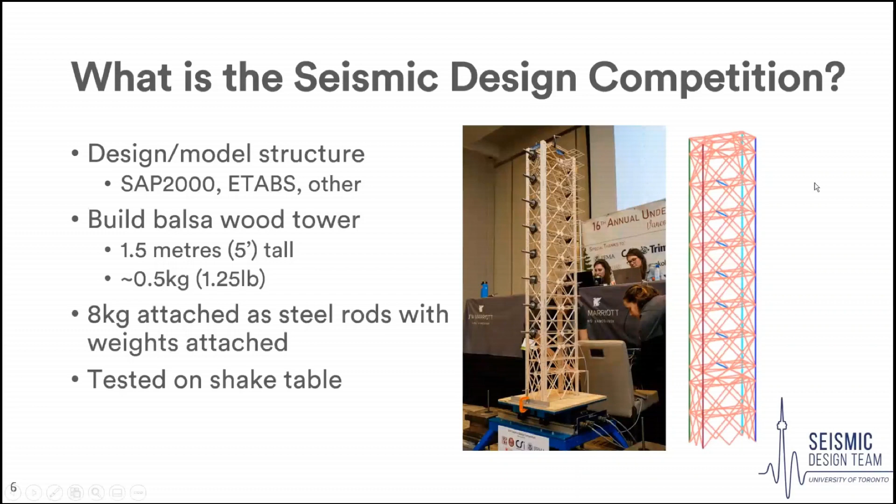So also, what is an earthquake? This is kind of really complicated, deals with plate tectonics and the earth moving around. But for us, what we need to know is it's a base excitation. So it's going to move the building, and it's going to be based on displacement. The earth is going to move 1 meter, and the building has to move 1 meter with it, because that's what it's being supported on.

It has some intrinsic properties, most notably the frequency content, which I'll get into later, but it's basically just what frequencies of building this earthquake is going to really impact. So just remember that earthquakes have something called the frequency content, and we'll explain that more later.

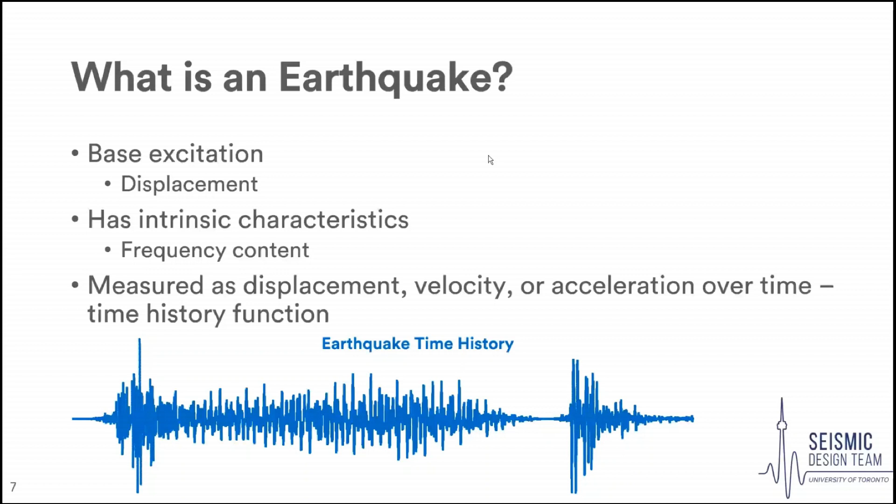So where are forces coming from in an earthquake? In normal loads, they're static, which means they don't change over time, and they're usually a result of applied pressures, like a desk pushing down on a floor. They're applied only in one direction, so usually you only have to worry about your maximum forces in one direction. A member is usually only in compression or only in tension. And it's applied at the point of contact, so where that desk touches the floor or where the wind is pushing on the building.

Earthquake loads are quite different. They're dynamic, so they're changing over time. You might have a different acceleration at one time than another. And they're also inertial, so they're not as a result of something pushing on something. They're a result of mass being accelerated and resisting that acceleration. This is, as I said before, generated due to the displacement at the base.

These loads are multi-directional, so an earthquake is shaking back and forth. You can have maximum displacement in one direction, then it'll come back around to the other direction. And so usually members that you might only have to worry about for compression, you might now have to think about compression and tension, have to think about both ways. You can't just design it to only be stiff in one way.

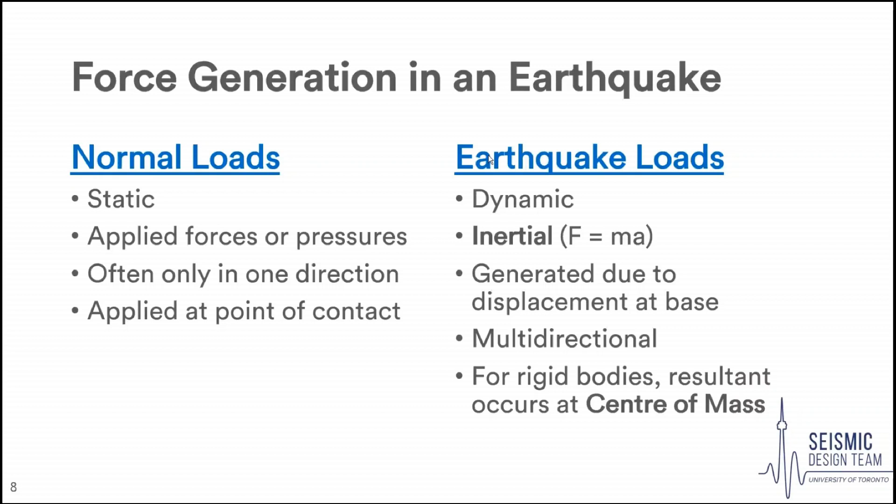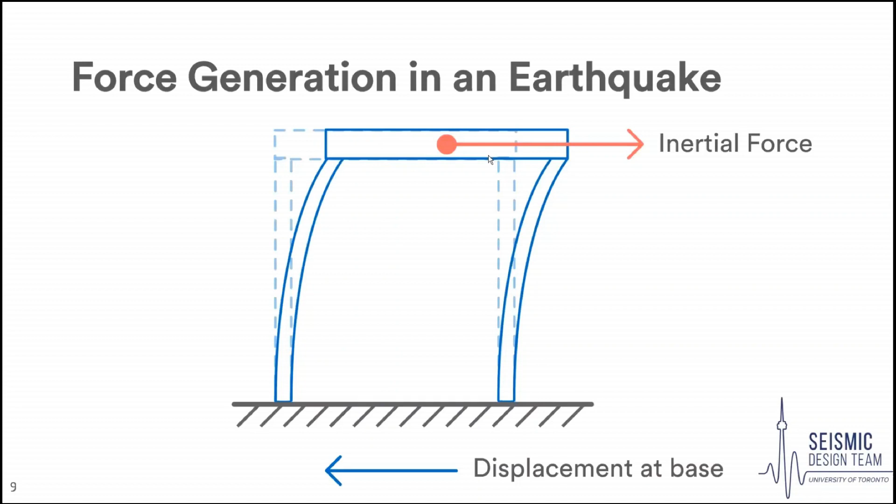So as the Earth is moving to the left, the mass is resisting it, and there's inertial force to the right. And you could think of this kind of like when you're on a subway or on a bus. As a subway or bus accelerates forward, you feel as though you're pushed back. And then when it comes to a stop, you feel like you're being pushed forward. And that's kind of that inertial force.

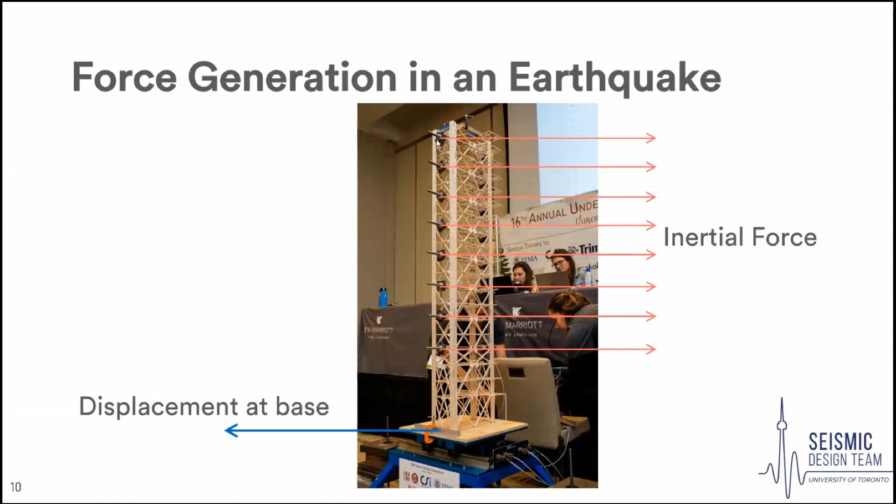So in the context of the competition, I know the angle isn't perfectly right, but if you imagine there's the displacement at the bottom, and then at each one of those masses, we have that inertial force going the other way. The reason we can just simplify it to the masses is that those masses weigh 16 times the weight of the building, so they're generating most of that force.

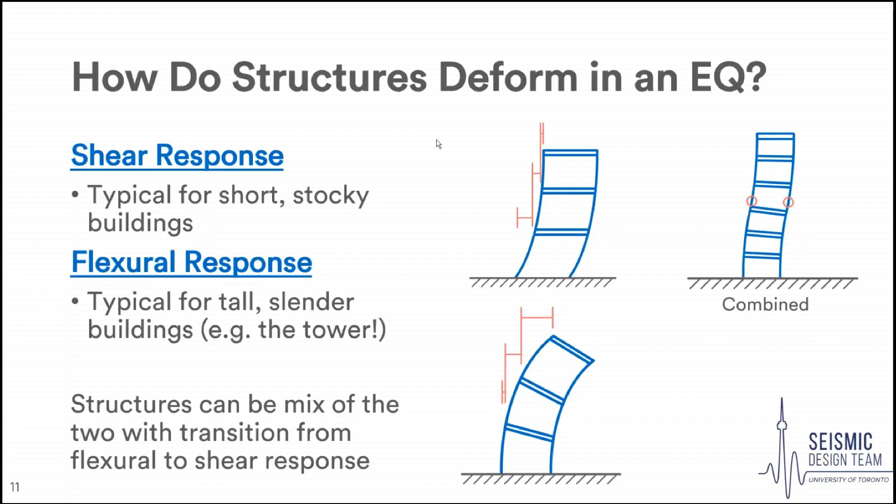A flexural response, which is on the bottom left, is the opposite. This is what happens in taller slender buildings, such as the tower. And as you go up and up, you'll have more and more relative displacement between the floors. You can also have structures that are a mix of the two with a transition from a flexural to a shear response, which you can see on the top right. And you can also see where I put the red circles, that's where it's transitioning from a flexural response to a shear response.

If you imagine a building with a flexural response and you kind of turn it on its side, you can pretend it's kind of like a cantilever, just pushing down. And just same as a cantilevered beam, you're going to have compression on the bottom and tension on the top. So if this is your tower, and you have a column in the middle and on the outer edges, you're going to have the most amount of compression on the bottom. In the middle, there's going to be much less force, and on the top, you're going to have the most amount of tension. And it's going to come in useful later when we're thinking about our tower as just a little bit of a cantilever.

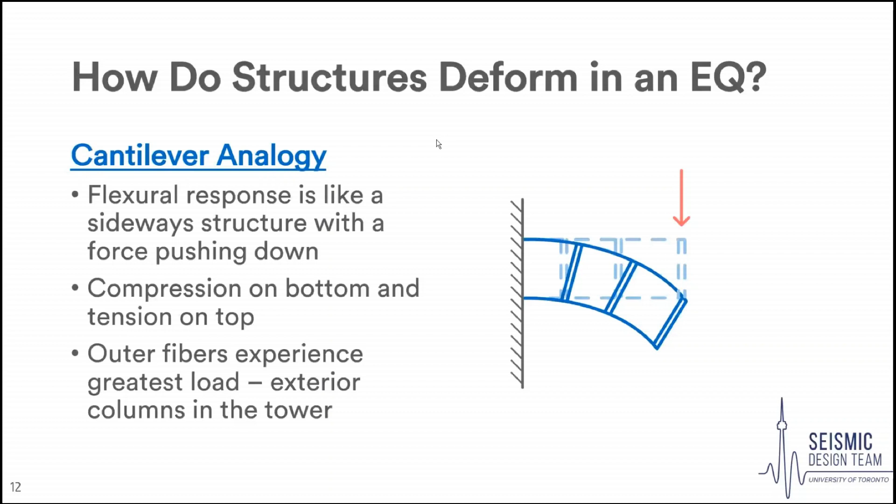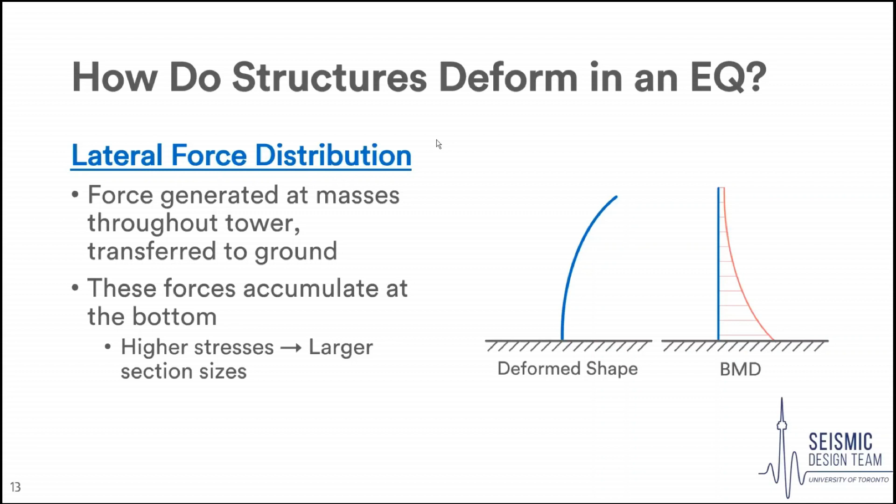What's also important is what's called the lateral force distribution. So this force is being generated throughout the tower, but eventually it has to all come back down to the base and get dissipated down to the ground, which means that these forces accumulate at the bottom. So you're going to have the higher stresses there and larger section sizes. So on the right, if we pretend that our building is still a bit like a cantilever, that's going to be this deformed shape, and that's going to be the associated bending moment diagram, close to zero at the top and then getting larger and larger as we go down.

So what is a free vibration? A free vibration is what happens when we fix the base of the tower. We'll put in all the weights, and we're going to excite the tower. So this means we can push it or pull it and just let go. And that's how we get those free vibrations. You can imagine those door stops where you accidentally hit it and it's just going to go boing, back and forth, and eventually come back to rest.

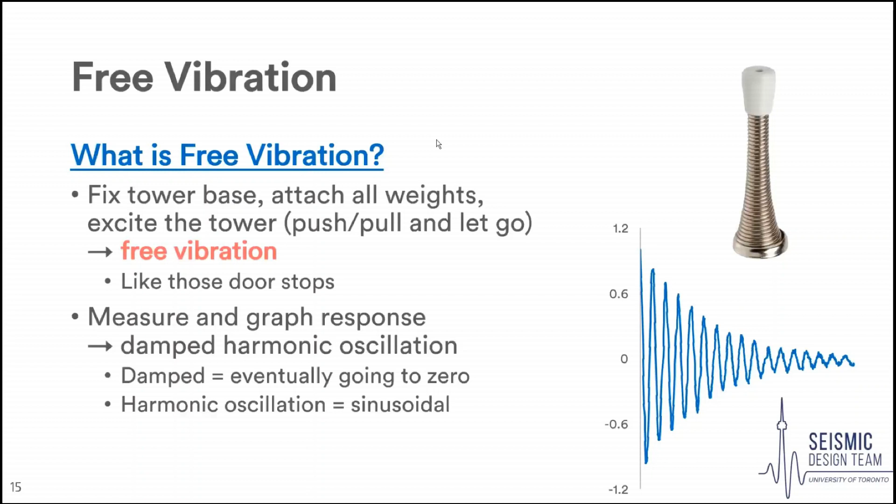And what we can do is measure and graph that response. So if we put, for example, a phone on the top of the tower, tape it down really well and use the accelerometer app, you'll get what's called a damped harmonic oscillation. Big word, but damped just means it eventually goes to zero, which you can see, and harmonic oscillation is just a fancy word in that it's sinusoidal. You can see those waves going back and forth.

Something that's really interesting that we can do is our towers are really complicated, but we can simplify them in the most basic way into what's called the single degree of freedom model. It's called the single degree of freedom model because a degree of freedom is how something can move, and this can only move in one way, back and forth, as you can see in the image.

And all this has is a certain mass at the top, M, and then a member supporting it with a certain stiffness, K, and this stiffness can depend on how strong the balsa wood you're using is, how tall your tower is, what size the sections you're using are. Bigger columns are going to be stiffer than skinnier columns. And also what's called damping, C, which I'll get into a little bit later, which refers to how fast your tower dissipates that energy and comes back to rest.

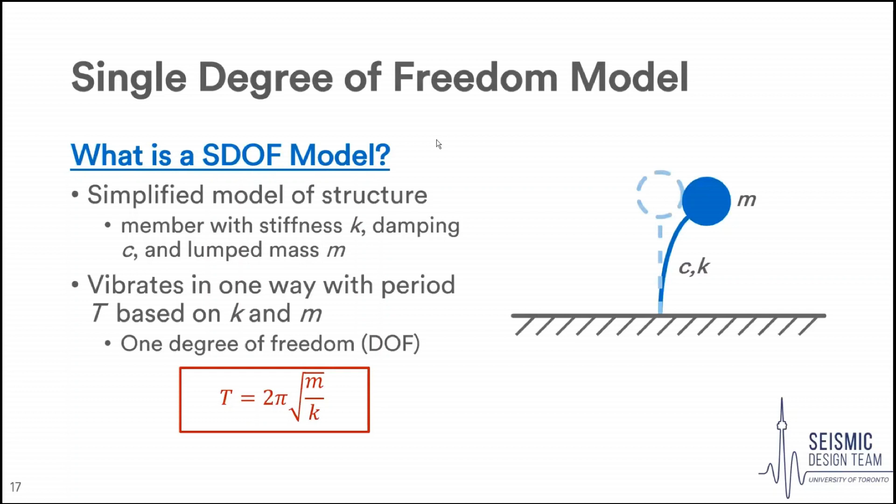So as I said, it only vibrates in one way, which is why it's a single degree of freedom. And it vibrates based on one period, T, which you can calculate very easily just based on the stiffness and the mass. And this period is really important. If you're going to remember only one thing from this presentation, it's that period governs the response of a single degree of freedom model, or really any model in an earthquake.

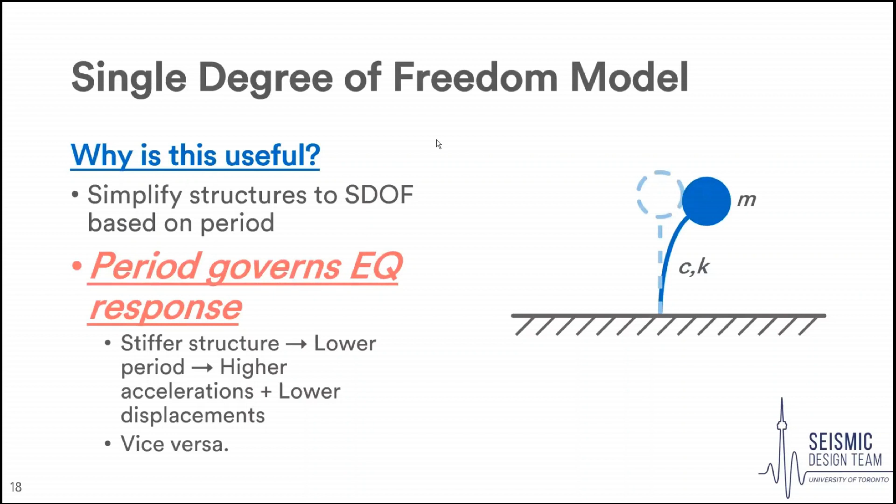So a stiffer structure, for example, a shorter structure or a much stronger structure, is going to have a lower period, and higher accelerations, lower displacements, and vice versa. A really tall, skinny tower is going to have a much higher period, lower accelerations, and higher displacements to a given ground motion. And so just remember that we can simplify whatever complicated model we have, whatever complicated deformed shapes, into just a single degree of freedom if we can characterize them based on the period.

And then, as I said, damping. So damping is a structure dissipating energy. There's a lot of complicated ways this can happen. For example, sections being moved, and then the molecules in the section heat up. It's a little bit complicated. Doesn't matter. What you have to know is just the structure dissipates energy. It's not going to vibrate forever.

There's a key concept known as critical damping, which is the amount of damping you need to come to a stop the fastest. So it's that red line that you see in the graph. That's critical. That's when a structure is critically damped.

You have overdamped systems, which also don't oscillate. They don't go back and forth, but they just take longer to come to rest, which is the gray line. And then you have underdamped systems, which tend to oscillate back and forth. And you can see that as a dark blue line. Our tower is underdamped, and that's why you can see it going back and forth in the free vibration graphs

that you saw before. What's nice is, because of some fancy math that I don't have to go into regarding differential equations, which we'll go over in a different Seismic Academy, this damping results in exponential decay. And the fact that it's exponential is really important because that allows for some math to be a lot easier later on. For a single degree of freedom system, this critical damping is really easy to calculate. It's 2 times the square root of the stiffness times the mass.

So you can see on the top, on the right, when the damping of our actual tower C is greater than critical damping, it's overdamped. When it's the same, it's critically damped. And then when the actual damping of the tower is less than the critical damping, which is true for the competition, it's underdamped.

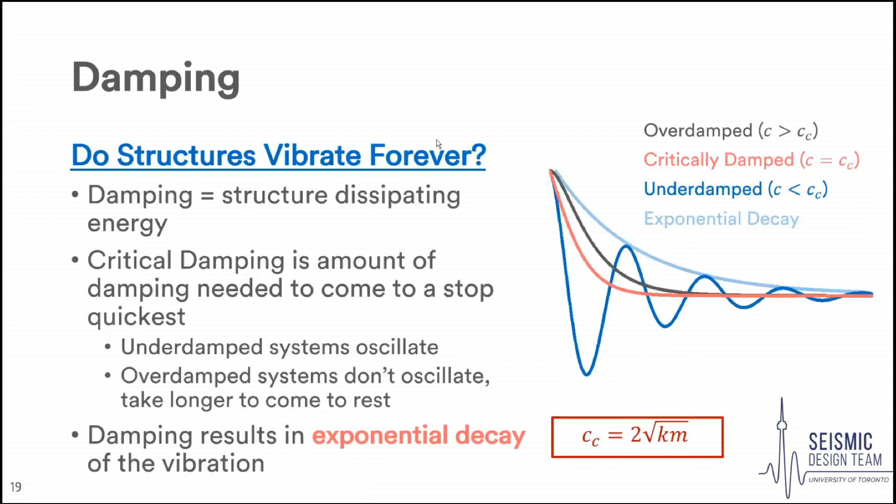In structural, we tend to define this damping not by that value C, but by what's called the damping ratio, which we use zeta for, the Greek letter zeta. And this is really simple. It's just the proportion of damping in our tower to critical damping. Typically in real buildings, depending on if it's steel or concrete and some other properties, it's generally thought to be between 2 and 3%.

For the competition tower, just from experimental testing that we've done in the past, we've found it to be between 1 and 4%. And this means it's really, really underdamped. It's really similar to that blue line that you see on the right. This damping ratio, it doesn't matter what ground motion you apply to it, doesn't matter what loads, it's intrinsic to the structure itself. It can vary by direction.

So for example, the tower that you saw before that looked rectangular, we have a different damping ratio for the long side and for the short side. But it doesn't matter what ground motion we apply to it, the damping ratio for whatever side that we're pushing it on is going to be the same.

The higher the damping ratio, the better, up to critical damping. So we want to be as close to 1 as we can, just because then the vibrations damp out fastest. It comes to a rest. You have lower accelerations, lower displacements, as you'll see later on.

Unfortunately, there's not much we can do when we're designing a tower to increase the damping ratio other than to add dampers, which we'll get into in a different Seismic Academy. This is kind of like you build the structure how it is, and you measure your damping ratio, and you hope for the best, hope for as high of a damping ratio as possible.

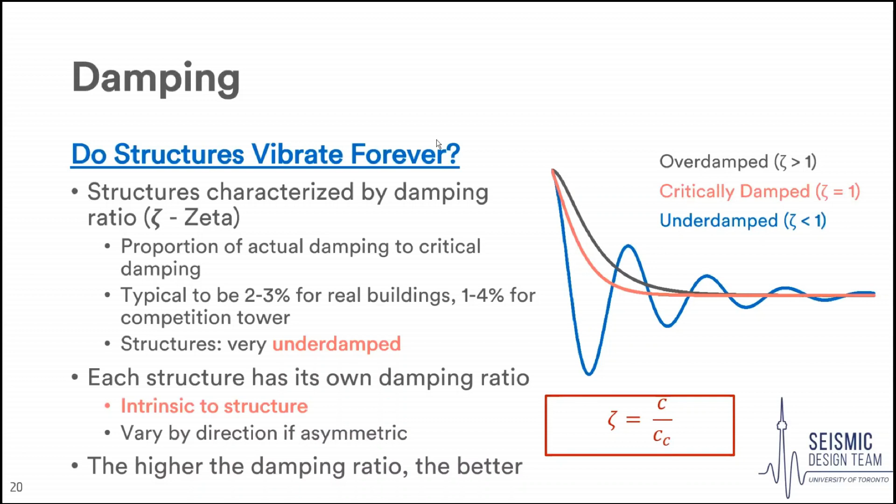So coming back around to free vibration, knowing what we know, we'll push on the tower, we'll get it to vibrate, and we'll get this graph. Now, if we get the distance between these peaks, that's going to be the period of the tower if we pretend it's a single degree of freedom system. And what's nice is since damping is exponential, we can use exponential decay to find the damping ratio of the tower using what's known as the method of logarithmic decrement, which is really fancy, but we'll go over some more simple math in a second.

And all you need to know for logarithmic decrement is just the relative amplitude of the peaks. So if the first one is 1 G of acceleration and the next one is 0.8 G's, that's all you need to know. And what this will let you do is calibrate your computer model to the built tower. Because usually how it works is you'll make a model in SAP 2000 or ETABS or something, and you're going to build that model. And then you're going to need to change your computer model to match up to the built model, because it's not always going to match.

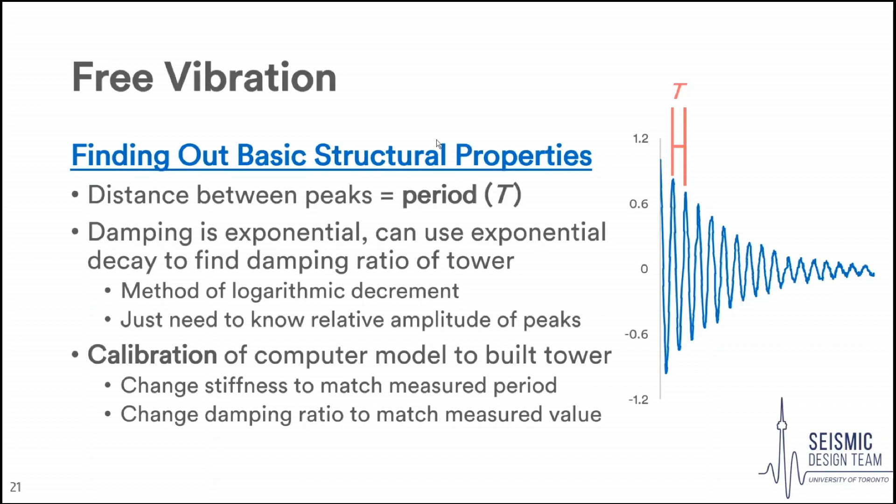You're going to have to change your stiffness. So this could mean changing the stiffness of the balsa wood or changing the stiffness of the connections in your model to match the measured period of the tower. And then you can change the damping ratio of the tower to match your measured value. So how do we get the damping ratio? This looks really complicated, but don't worry.

And then what's really nice is our towers have really low damping ratios, and that allows us to make it even simpler. So it's going to be approximately equal to just the ln of the first peak divided by the second peak, divided by 2 pi. And we're going to see that in a second with this really quick example.

And the reason I did this is that sometimes I might push a little harder or pull a little harder. But what's really important is what happens when we divide by that maximum acceleration to make them all kind of normalized, like a bell curve almost. And so knowing the times of those peaks, we can just subtract the times to get the period. And you can see the period is about 0.1 seconds approximately.

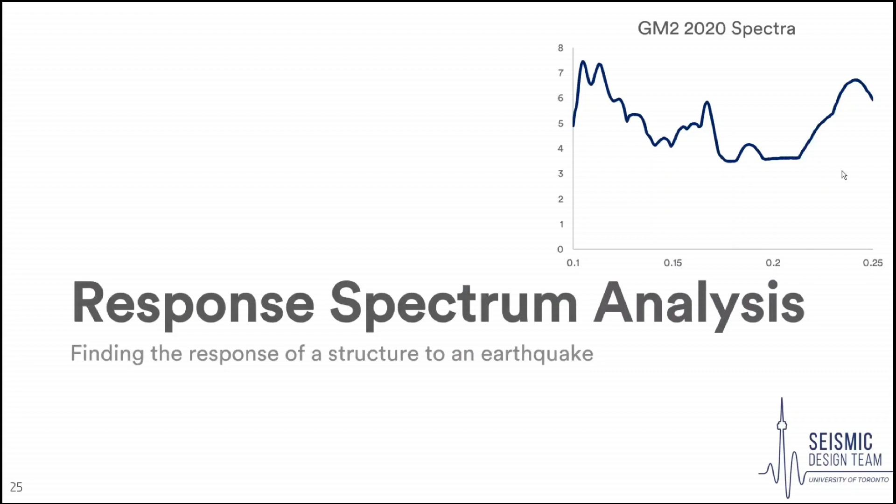So using those basic properties, we can characterize the response of the tower using what's called a response spectrum. So what is a response spectrum? The key thing to know is that towers can have really complicated deformed shapes. They can move in all sorts of ways. But we can break it up and simplify it into what are called the modes, which is just a fundamental way a tower can move.

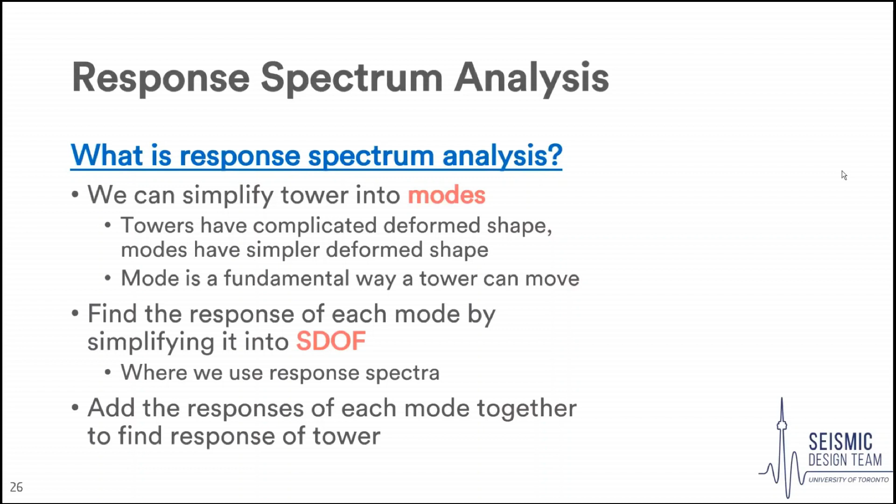So for example, one mode of the tower can be the cantilever motion. And you'll see a picture example of this in a second. We can pretend all these modes are themselves their own single degree of freedom systems, just based on the period. And this is where we can use a response spectrum, which tells us the response of a single degree of freedom system to a ground motion, add all those responses of each of those modes together, and find the response of the whole tower.

So why can we do this? The reason we can do this is actually because we can build up a ground motion. So if you add up an infinite series of sine waves, you can build up any function you want, including earthquake ground motions. And what's nice is you can go the other way. You can find out which sine waves you used to build up that ground motion. And using something called a fast Fourier transform, which we'll go over in a future lesson, what's key is you can find the frequency content of this ground motion.

And what this means is if your structure has a certain frequency, like 5 hertz, and the ground motion is made up of a lot of sine waves of 5 hertz, that's going to be really bad. It's going to lead to what's called resonance, which I'll get into in a second. This frequency content really impacts the response of the structure, and it's intrinsic to each ground motion. So it doesn't matter what structure, a certain ground motion is going to have a certain frequency content. A different ground motion is going to have a different frequency content.

So what is resonance? Resonance is what happens when that ground motion is really hitting the fundamental frequency of the tower. So the period at which the tower wants to vibrate, if the frequency content of the ground motion has a lot of frequencies in that range, it's going to resonate. That means that there's going to be amplification of how much the tower wants to vibrate. Really bad, do not want this to happen. You want to be as far away from resonant frequencies of the ground motion as possible.

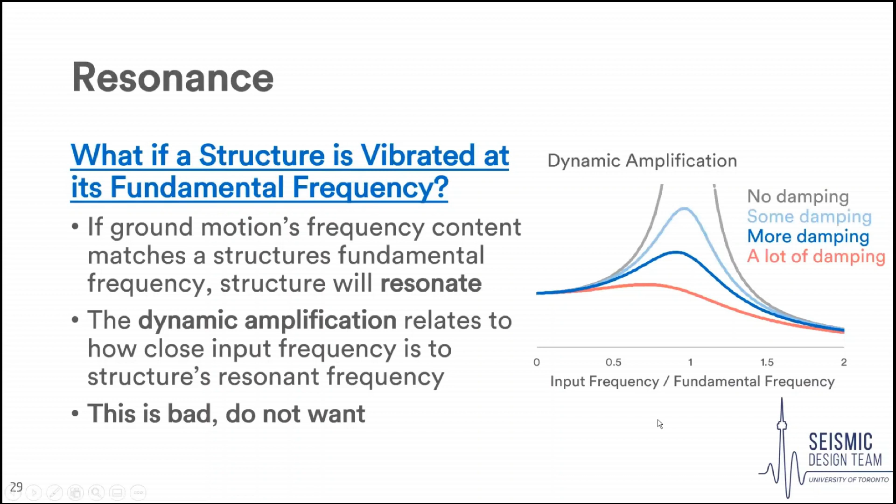And it's just a function of the input frequency, so what the frequency content of the ground motion is, and the fundamental frequency of your tower, which is if you pretend your tower is that single degree of freedom system, what's the period of that system, the frequency of the system. Real towers, as we know, though, are multiple degree of freedom systems. They can move in all sorts of ways, not just one. In reality, towers have infinite degrees of freedom and infinite modes. This is really complicated to analyze without computers.

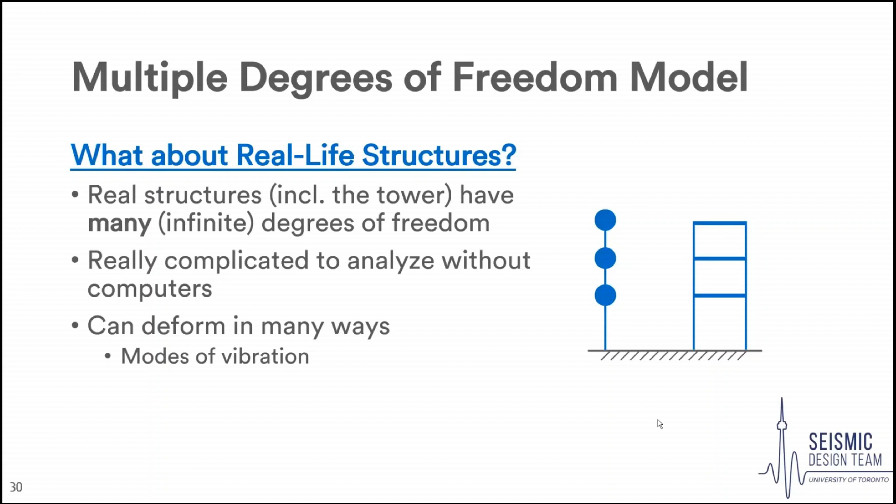These modes are intrinsic to a structure, so it doesn't matter what ground motion you're applying to it, those modes are the same. And what's important to note is that each mode is going to oscillate with a different rate, which means each mode has its own period. So for example, the first mode might have a period of 0.12 seconds. The second mode is going to have a period of 0.05 seconds, and so on.

It's really complicated to get these modes. It's something to do with finding the eigenvalues and eigenvectors of the stiffness matrix of your tower. Complex stuff, a lot of linear algebra. Don't worry. What's nice is that if you model your tower on whatever software you have, SAP, ETABS, Robot, doesn't matter, you can use modal analysis and get all the modes of your tower, as many as you want, with the periods, with everything. So that's how you get those modes.

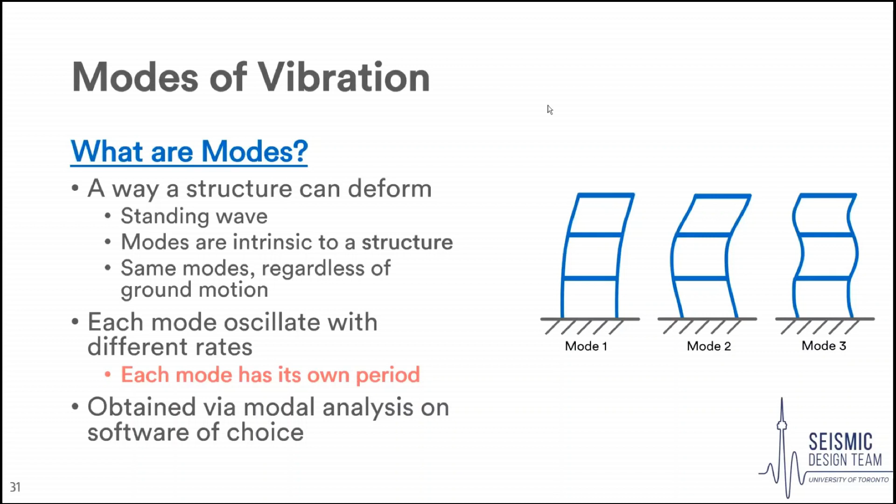What else is that each mode is going to impact the structure differently. So a proportion of the structure's mass wants to move with each mode, and that's called the mass participation. Usually the more complicated the mode shape, the more points of zero amplitude, the more points of maximum amplitude you have, the higher the frequency, so the faster it vibrates, but also the lower the mass participation.

And what's nice is that it's a proportion. So if you sum up the mass participation for all the modes, the infinite modes, that's going to be 100% mass participation, which means that's how your real tower responds. Generally, in the competition tower, your first mode, the cantilever mode that you can see on the left, has between 65 and 90% mass participation. So it's going to be really good at generalizing most of the structural response.

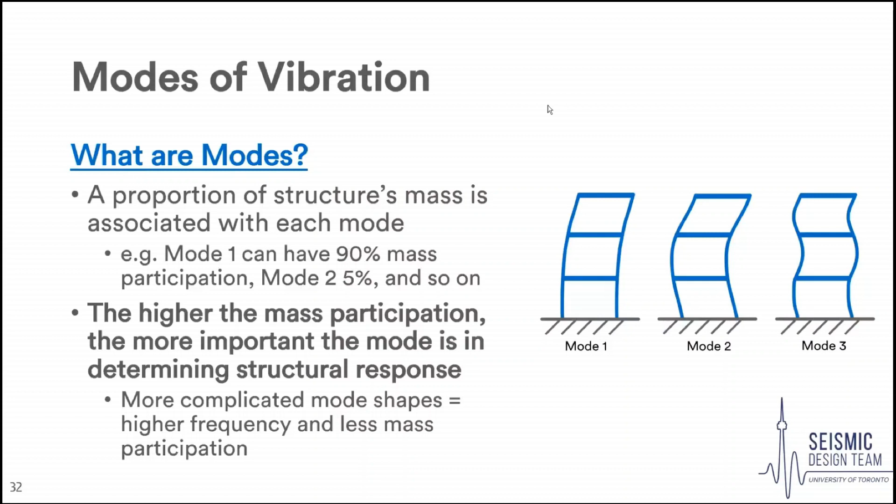What's nice about these modes is that we can break them up, as you can see. The period of that first mode that I talked about, the cantilever mode, is what's called the building's natural period, and the inverse is called the fundamental frequency. So when you break your tower up, that first mode, usually the cantilever mode, if it has a period of 0.2 seconds, then you'll say the natural period of the tower is 0.2, and the fundamental frequency is 5 hertz.

How you know what number the modes are is based on their period. As I said before, each mode has its own period, and the first mode has the largest period, and on and on. Mode N is going to have the smallest period. And so they're going to vibrate with higher frequency and with lower displacements.

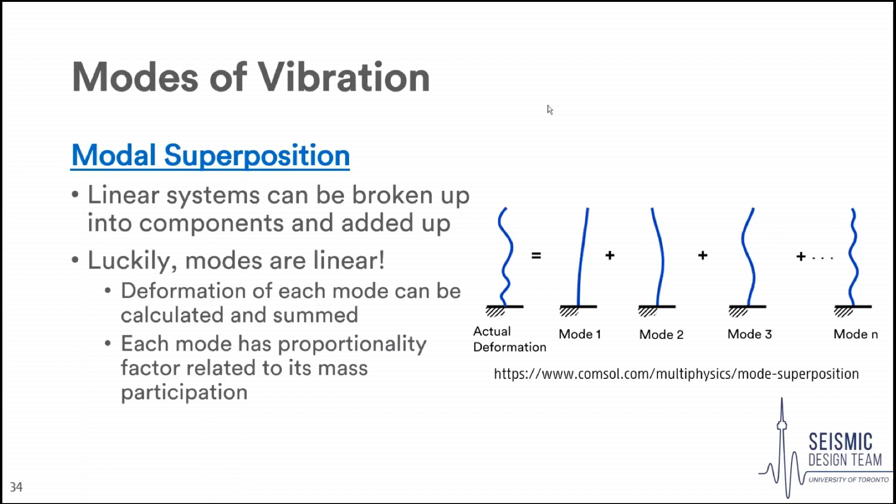What's nice is these modes are linear. And if you remember linear systems from statics or any other class where you had to add a bunch of things up with linear terms, you can break them up and find the response of each of these modes separately. And then with a factor of proportionality, which is just based on the mass participation, so how much mass is moving with each mode, find the response of each mode, and add them all up. When you add them all up, you get the actual deformation of the tower, as hopefully this image on the right demonstrates.

So just to review what we learned, for a single degree of freedom system, the period governs the dynamic response. And the frequency content of the ground motion influences the dynamic response a lot. A structure has infinite modes, but by breaking them up, we can approximate the response of the tower by just using as many modes as we need, using modal superposition.

So what are we going to do? We've built our tower in whatever model we want, SAP 2000, ETABS, it doesn't matter. We found the different modes of our tower, and now we're going to find the periods of those modes. As I said, they all have their own period, and pretend they're single degree of freedom systems. So their response is characterized just by that period.

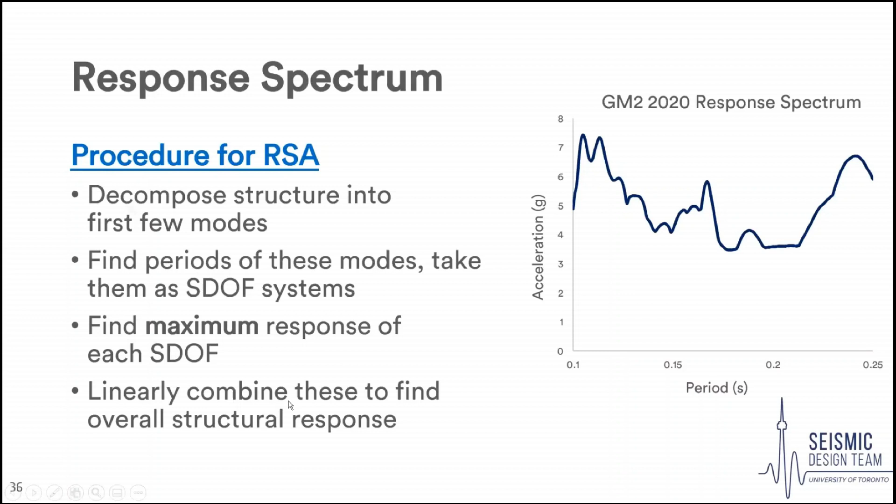So what this response spectrum really is, it's summarizing how a single degree of freedom system of any period, but of a specific damping, responds to a specific ground motion. So as you can imagine, each ground motion is going to have a different response spectrum, and the damping ratio of the tower is also going to affect this response spectrum.

And what you should note is that when there's an earthquake, you're going to have a whole time history of the acceleration of that single degree of freedom system. What this graph is showing is just the maximum response. So for example, we look at a single degree of freedom system, 0.15 seconds, and we go up, we see that its maximum acceleration for the whole ground motion is about 4 Gs.

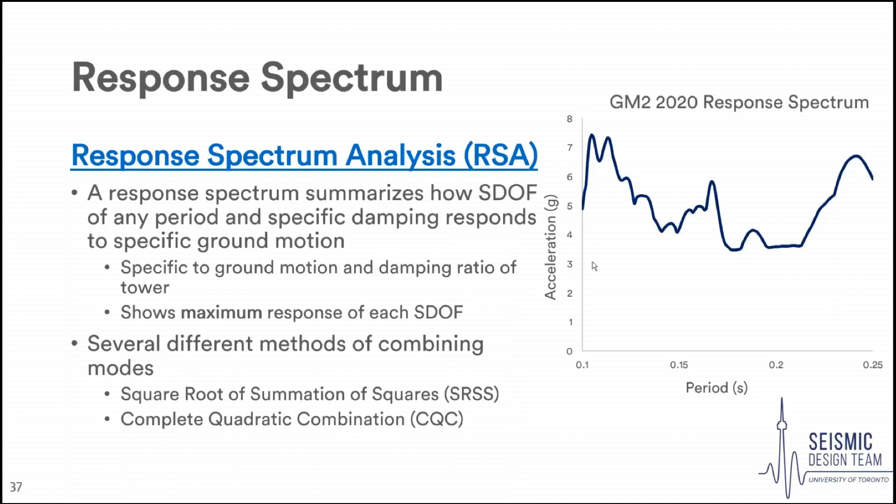There's different ways of combining these modes called SRSS, CQC, there's other ones. And they're used in different scenarios, like when your modes are really close together, when their periods are similar, or when their periods are far apart. You can find the calculations online. There's tons of different resources.

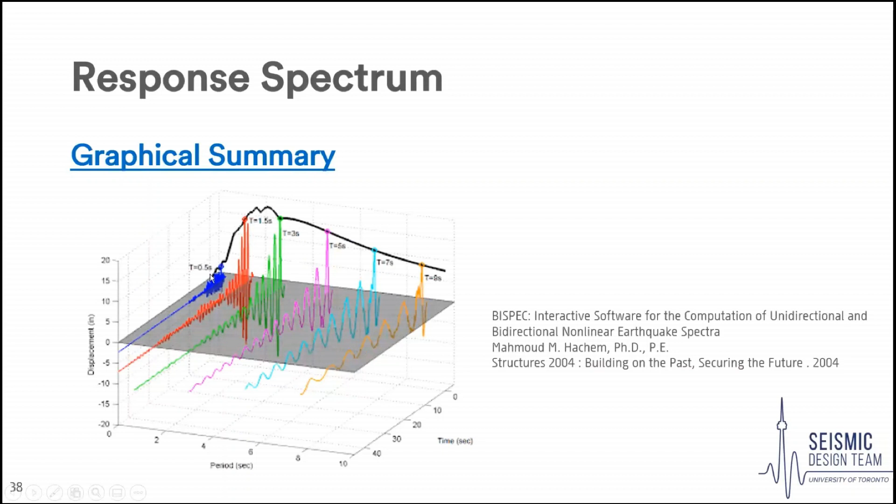So we're going to go over a little bit of an example. People that are more familiar with this competition might know that the people that run the competition give us a response spectrum. However, it assumes 5% damping, which we think is probably a little bit too high for most of your structures. Although if you get 5%, that's great. It's better to use a response spectrum that's associated with your tower's damping ratio.

What we use is something called SeismoSignal by Seismosoft. You can get an academic license at that link below for free with no time limit. So I'm just going to quickly go over how to get one.

I hope, can everyone see SeismoSignal right now? Can someone just type in chat? I hope you guys can all see it. So I have something loaded in here now, but let's say I didn't. I'm just going to go open. Oops. Okay, Coda says we can do it.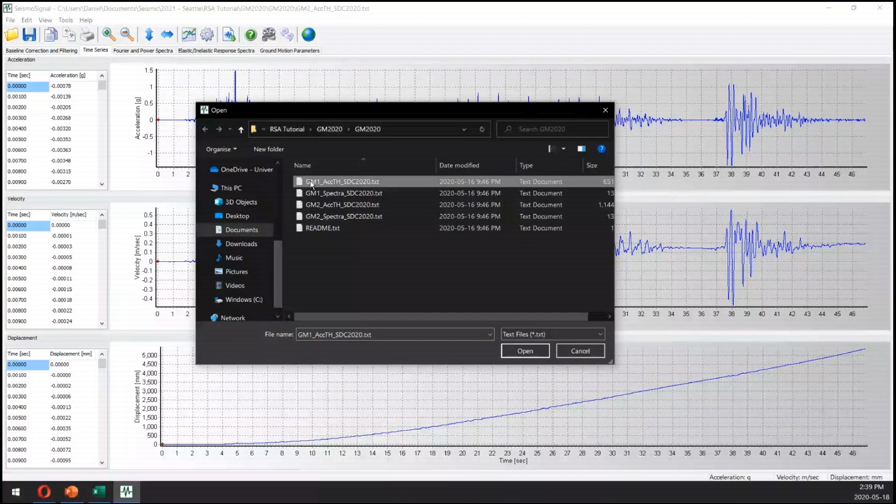So I'm going to open. This is where the competition ground motions are. I'm just going to open the acceleration for ground motion 1 that the SDC gives us. Okay, so usually it gets it pretty right. My first line is line 2. My last line is whatever it calculates. This time step is really important. Make sure it's correct. And then I'm going to change the units to be whatever I want.

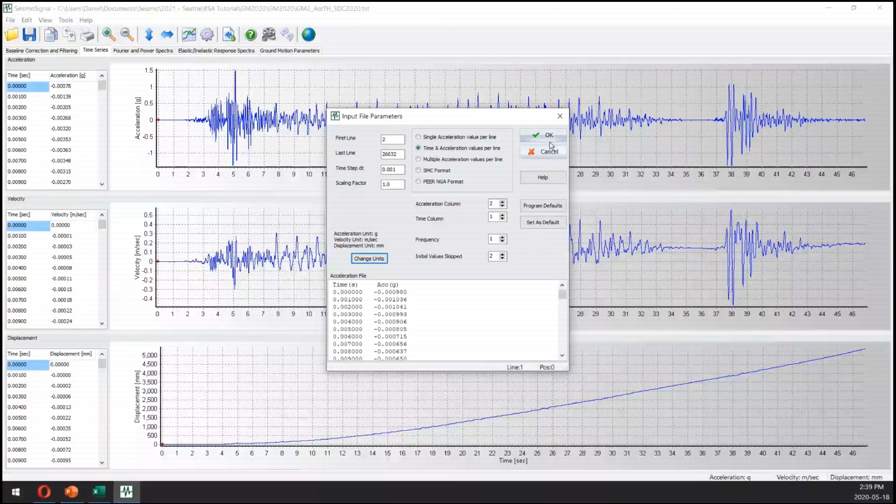Usually I work in Gs, meters per second, and millimeters. I don't know if there's any Americans here, but if there were, you can change it to inches, something weird like that. I'm going to press OK. Takes a little second to load. There we go. And you can see the acceleration on top, the velocity. The displacements are a little weird because it uses double integration. We don't have to go into why this doesn't come back to rest. But what's important to note is this is our time history of the ground motion on top and acceleration.

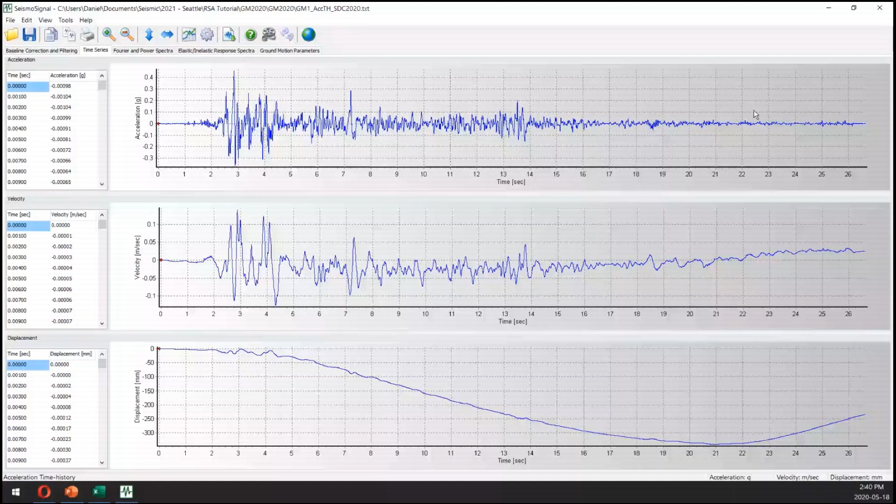We're going to go over to this tab called Elastic and Inelastic Response Spectra. And now let's just look at what happens with 3 different damping ratios, 1, 3.5, and 7%. I'm going to go into settings, and I'm going to say, let's look at between period of 0.08 to 0.2 seconds for our single degree of freedom systems with a step of 0.01.

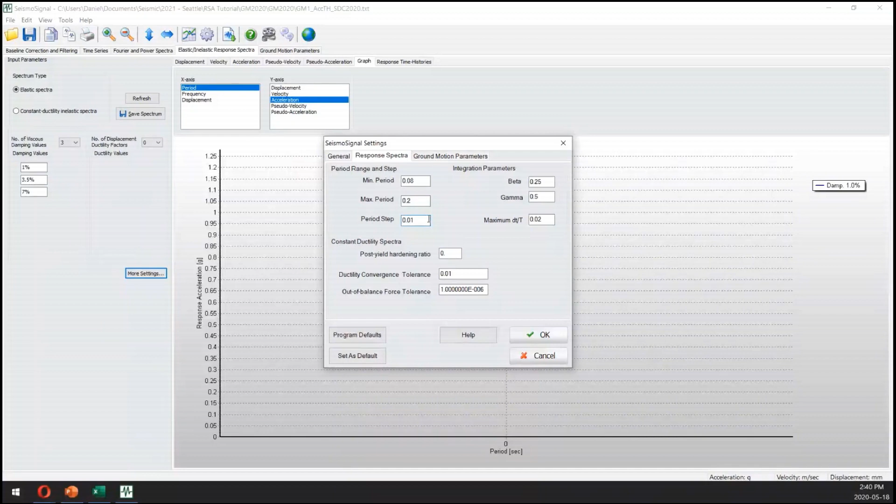Going to hit refresh. And so this is telling you there's no x-axis, but at this period, if our tower has a damping ratio of 7%, we're only going to get 0.7 Gs. But if we have a damping ratio of 1%, we're going to get all the way to 1.5 Gs. So this is showing you that the damping ratio of the response spectrum matters quite a bit.

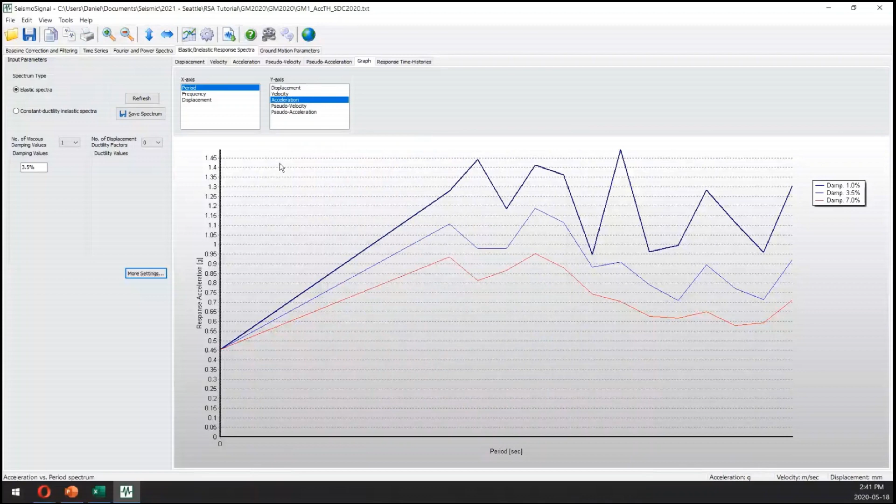And then you can also refine this. You can only look at the damping ratio of the tower that we have. So let's say it was 3.5%, which we got before. And we can make this much finer. Refresh. And it's much smoother, right, which is much nicer.

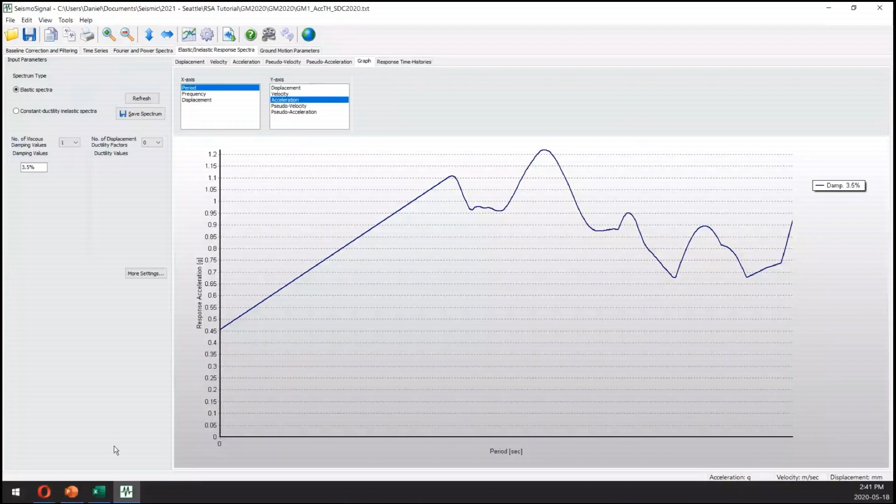What's nice is we can save these spectrums as text files, as CSVs, look at them on Excel, do math with them that way. So that's how you use SeismoSignal, which, as I said before, you can get for free. Okay, so that's that. Now, how do we actually use this? So now we're going to go to Excel.

So here I have a response spectrum from ground motion 1 from last year. So depending on the period of the system, we're going to have different maximum roof displacements. And the way this works is I have my modes from SAP 2000. So I built the structure in SAP 2000. I modeled all the weights and everything. And it told me for mode 1, this is your period, mode 2, this is your period, and so on.

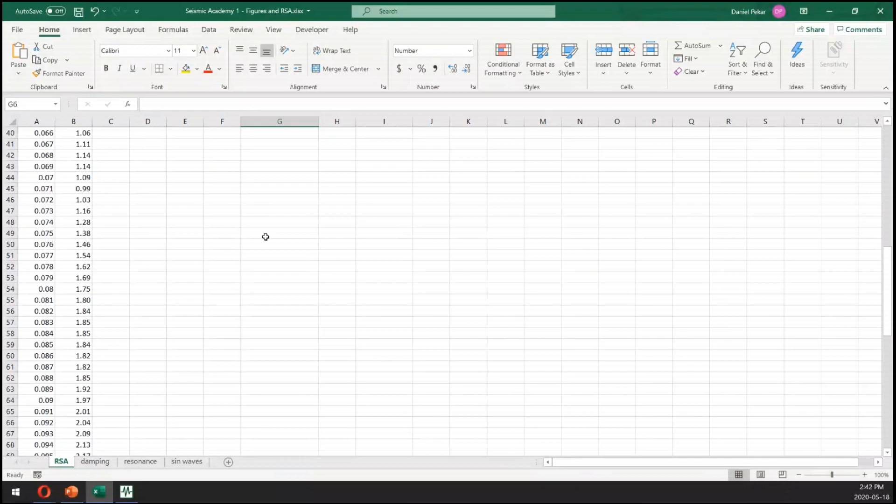And what I'm going to do is kind of what it's showing on this graph. I see 0.129. I'm going to go down to where 0.129 is and see 3.68 is the maximum roof acceleration, the roof displacement, experienced for the whole ground motion. So you find the period, find the displacement or acceleration, or whatever value you're looking at, and read it off. So we're going to go through this whole thing. So 1.02, 2.63, 1.01, 2.52. You can obviously automate this with some kind of script.

What's nice is that also most commercial software do this automatically for you, but I think it'd be good if you know how to do it. So 0.7, 1, 2, 2. Okay, so we have all of our different responses of each of those modes. We're going to use what I mentioned before as sum of the responses, the square root of the sum of squares. So we have all these responses.

Now we're just going to square them all. So I squared that one. We're going to drag this down. Now I'm just going to add all of these responses up. And you can see these ones on the bottom, the higher modes, they matter much less. What's the square root of 0.0023? It's tiny, right? These first couple of modes dictate most of the response of the tower.

And as I said before, the fundamental mode, the natural period, this mode number 1 is doing most of that. You can see it's 2 times as big when squared, as any other mode. So now we have the sum of those squares. All we have to do is take the square root, and there we go. This is the response of our tower to ground motion 1 2020.

So this will tell us the maximum displacement or maximum acceleration of our tower for the entire ground motion. It's not going to tell us the response at every point in time, the time history. We'd have to do a more complicated analysis for that, but it'll just tell us the maximum. Okay, so that was that tutorial. And you might be wondering, how accurate is this? This seems pretty simplified compared to a real tower.

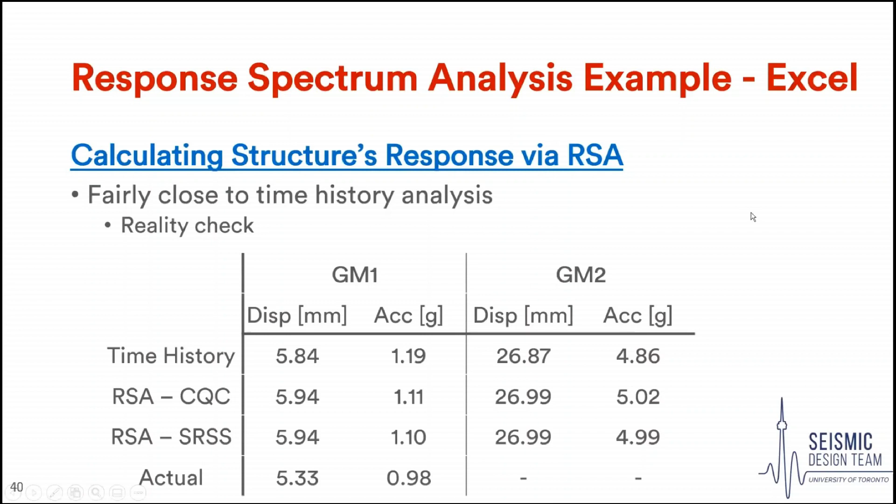Don't worry about that. What's nice also is that this provides a good reality check. If your RSA and your time history analysis are giving 2 wildly different results, that tells you something's wrong in your model. So that kind of tells you how to calculate the response of your tower, how to get some of those properties that you need with variation, and some context.

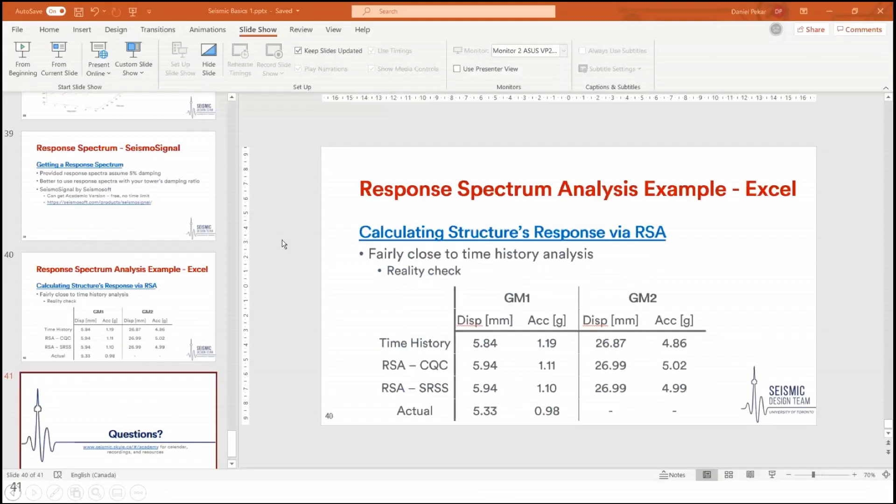All right, Dilly asks, can you explain one more time where you got the values for the different modes in the Excel spreadsheet that you're using? Sure. So let's go back to that. So these modes I didn't calculate by hand. What I had to do is I had to build a SAP model.

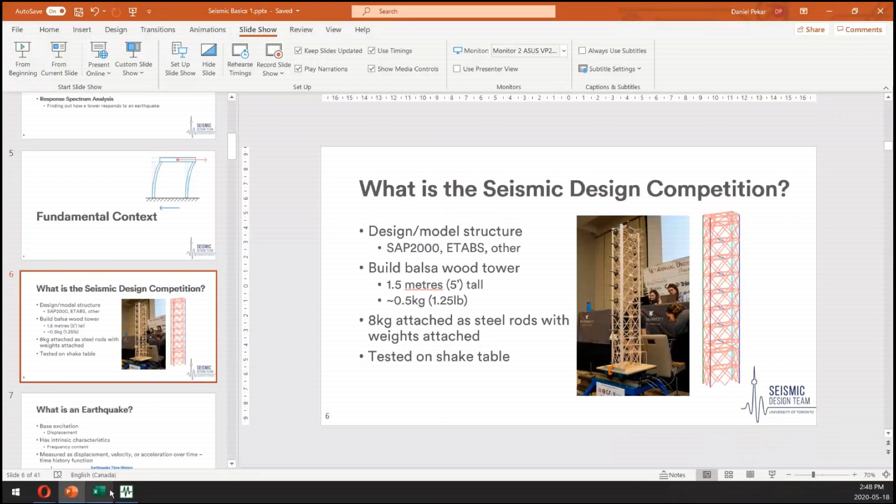So you can see in this slide, this model is built on a proprietary software called SAP 2000. You have to put in all the members, all the conditions, like it's fixed at the bottom, has those weights going through it. You have to put all that in, and then you do what's called a modal analysis, which the software will do for you. And it'll give all of those modes with all the different periods, it'll tell you mass participation, all those different factors as well.

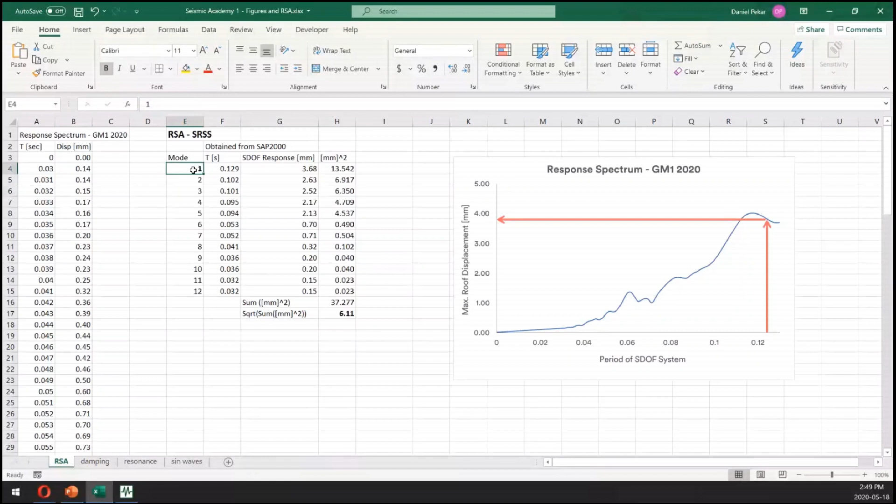So this is really kind of hard to get by hand. It's a lot of matrix math, a lot of linear algebra. But thankfully, I believe UPC uses SAP 2000 for you guys. So when you have the model made in SAP 2000, it'll tell you what your modes are.